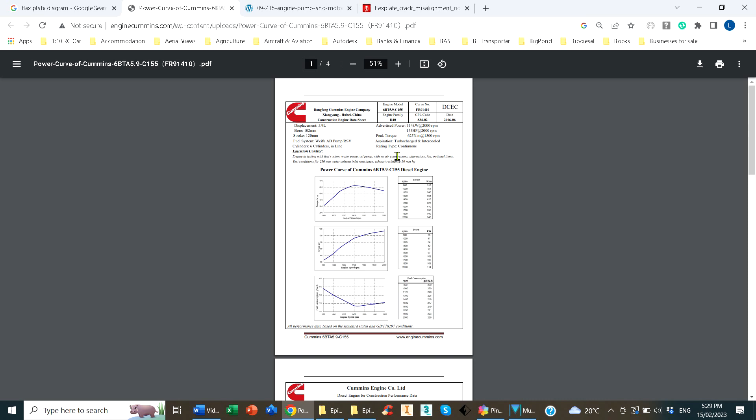Okay, you know what power you want to use now, so we've got to select an engine to do it. That's done using specification sheets from engines. You'll probably find your customer, or indeed you yourself, may have a brand of engine preferred - Caterpillar, Detroit, etc. But I'm going to use some Cummins information as an example. This is the first page of a multi-page data sheet from Cummins - it happens to be a Dongfeng engine, a 5.9, 6BT5.9.

Most people will look straight to these curves. If you're interested in horsepower, that's where you'll be looking at a power curve. Sometimes people will look at a torque curve and be very keen on what the peak torque is. I'm going to be controversial and say that peak torque doesn't matter - the role of the gearbox and drivetrain is to create torque.

There are two reasons for worrying about torque. One is that it makes the vehicle more drivable if it is at lower RPM, and that's typically the reason people like V8s. Apart from the raw power, it tends to be low down and they can get off the line easier.

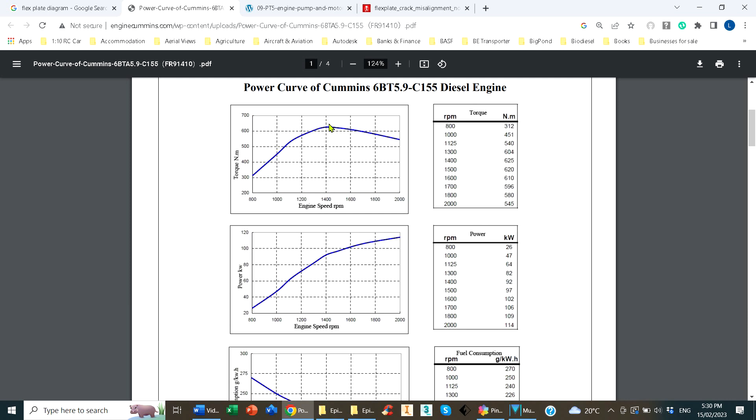The other reason that torque is important, and the speed at which it happens, is this third curve down here - this is fuel consumption. Generally, peak torque coincides with the minimum fuel consumption in grams per kilowatt hour. So the further down the hill that comes, the better, because that means you can get a highly efficient vehicle running down the highway.

You probably realize that even in your family car now, you've got 6 speeds or more, and if you're going down the freeway, you're at very low RPM. The reason for that is efficiencies - the lower the speed of the engine, the less losses within the engine.

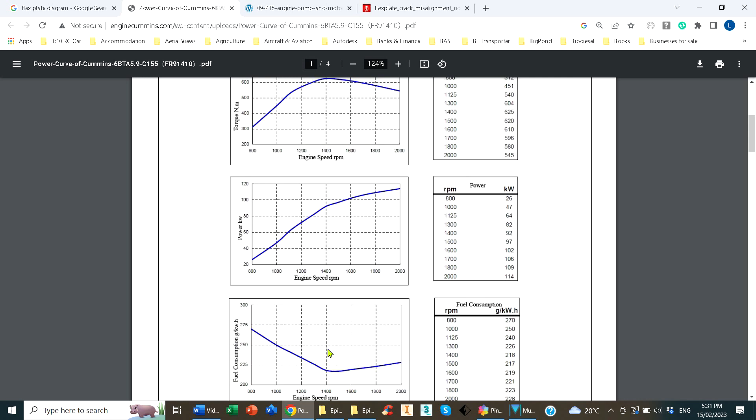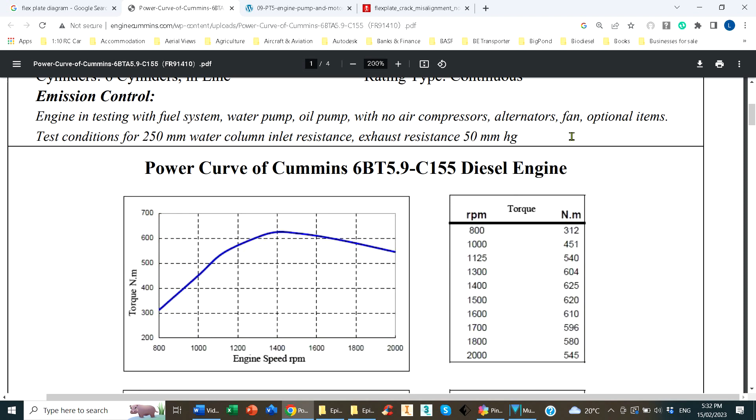Now, I said most people will go straight to the curves, and they will overlook the fine print. In anything, the fine print is important. Engine in testing with fuel system - well, that's good because it wouldn't have run without it. Water pump, that's probably good. Oil pump's definitely good. And no air compressors, alternators, fan or optional items. So this power curve does not represent the real engine, because in the vast majority of cases, it's going to have an air compressor, alternator and fan at the very least. We've already said that fans are a big power draw.

So you need to take these curves, let's say the power curve, and superimpose on it, perhaps underneath it, the power draw from the ancillaries. That'll tell you perhaps that this engine isn't big enough. Always read the fine print.

Now, in this particular case, it's pretty good. It actually says inlet manifold and exhaust back pressure. Doesn't say what temperature it was, but it's probably 20, 25, somewhere around there. They're also important characteristics.

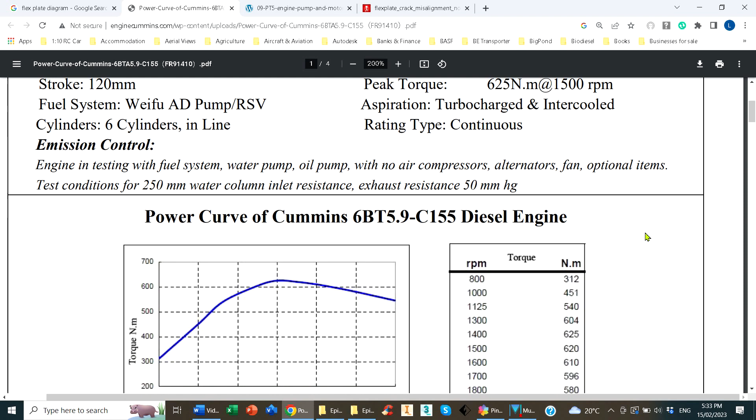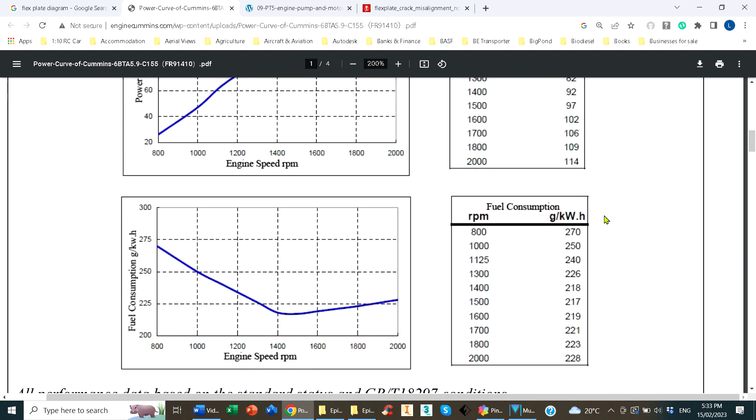So let's assume we've picked an engine. If we go down this data sheet, the first thing I like to do is select the components for the air intake, because without the air intake, it's not going to run. And here's some key data - maximum intake restriction, clean element, dirty element.

This is not the total resistance of the air intake. You still need to allow for pipe work and perhaps a whole heap of other things, being air shutoffs and extended pipes. But it starts to give you a pretty good idea of what you need to size your air intake.

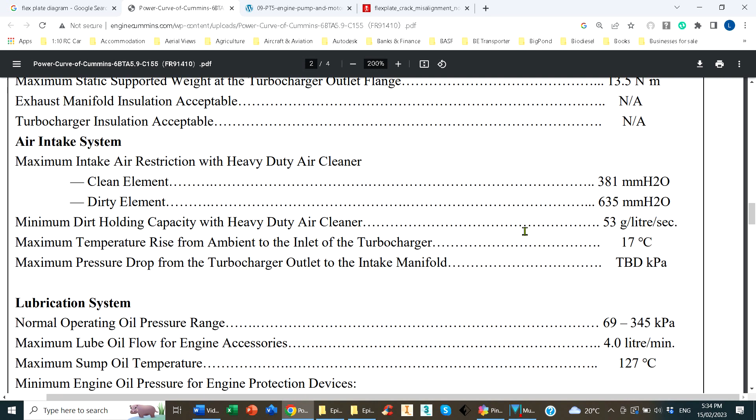Cummins also have this thing about dirt holding capacity. So it's suggesting a heavy duty air filter with 53 grams per litre per second of dirt holding. If I remember correctly, that's because they have a minimum in-service life for the air filter, presumably to try and stop people using air filters for extended periods.

So now you've got some basic characteristics for the air filter that you require. For me, I usually design a system that's got a resistance 3 times that of the air filter. That's typically for mining because there's a lot of other things that get inserted into the intake system, but I can come up with a number.

I then have to figure out the packaging. Now for mining, it would be a metal housing, not a boxy little plastic box - something robust that's going to survive the duty. And we're going to use a Fleetguard example here.

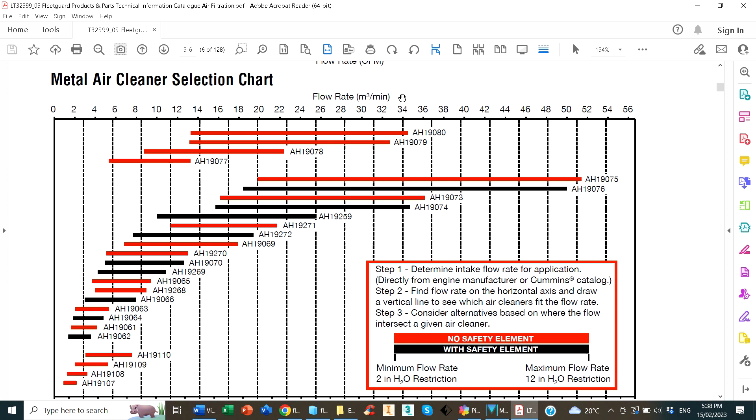Here's a chart for metal air filters. Now metal relates to the housing, not the element. And there's a range here of flow rates, and if I just move down a little bit, in CFM. And you can start to see how you might select one.

Now this gives you the option of red with no safety element, and black with safety element. I would suggest it's a very brave or foolish man that designed something without a safety element. So we're going to look at the black.

So if we know we need 900 CFM, we're going to be somewhere up in this range. Do you want to be right at the top end, or do you want to have something a little bit in reserve? So that's starting to give the selection of filters that you could use.

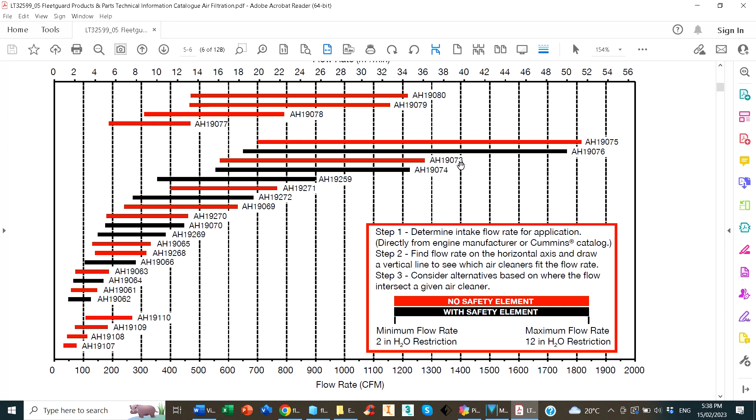So we'll just flip down and find the AH19074.

Now we've tentatively selected a model, we can look at some of the characteristics. The lengths - generally the filters are too damn big to fit. And that's why this step of selecting filters is very crucial.

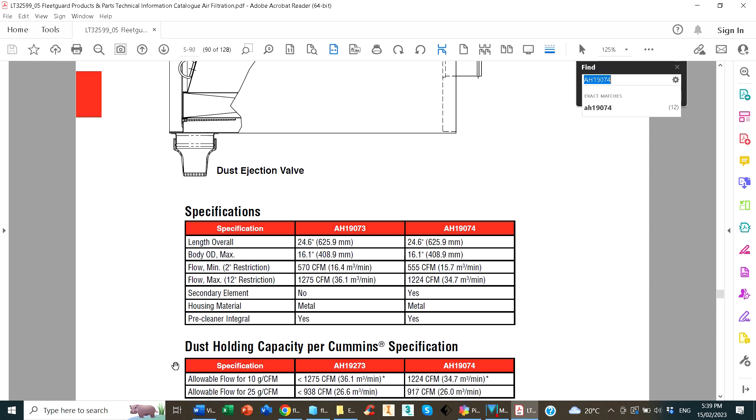You'll see dirt holding here and dimensions, specifications, and if we go down, we get more information, and even in this catalogue a suggestion of accessories like hoods and elbows and so forth. And there's the actual performance for this filter. All of this information is readily available and should be used, should be investigated, and make sure you've got the right product.

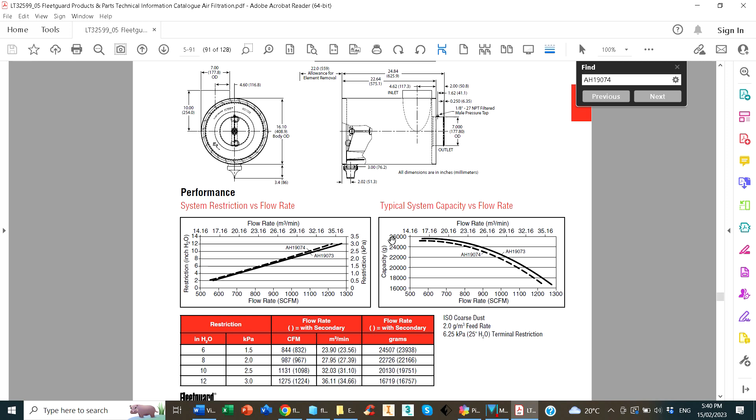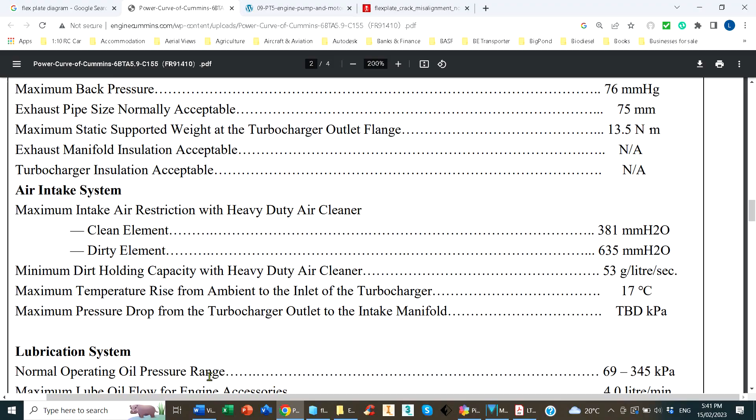The same sort of review is possible for the exhaust system. And again, we'll use some Cummins data. So back here on our data sheet, right next to the air intake system is the exhaust system.

Maximum back pressure, exhaust pipe, etc. So you straight away know what exhaust pipe you should be using, and you can start to work out what muffler, exhaust conditioner, spark arrestor, etc. that you require. So this again is core data that's readily available. Up to here.

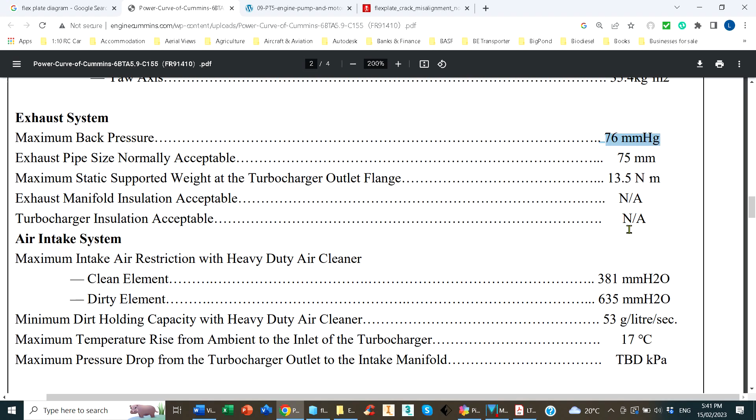But of course in exhaust systems that isn't the end of it. You're likely these days to have a DOC or a DPF to either oxygenate or otherwise treat the exhaust.

DPFs come in 2 types, wall flow or flow through. Advantages, disadvantages for both - they're designed to handle particulates. DOCs are generally designed to oxygenate the exhaust to allow other combustion processes to happen, and they often form the first phase of a DPF.

These things are expensive, they're generally sensitive, they don't like an engine idling for a long time and then put into heavy duty service - you'll probably melt something, an expensive something. If you're running ceramic wall flow DPFs, you're probably going to have scheduled burn-off times to get rid of the particulates that are trapped inside. Again, another complex subject, not going to be covered in detail today.

Many mining applications also have exhaust gas coolers. They can be of various types, but typically some sort of heat exchanger with special tubes that the gas runs through and is cooled by water, typically from the engine water jacket. Some flow is stolen from the engine block and passed down through the gas cooler. So again, that's more resistance that you've got to design for in the exhaust system.

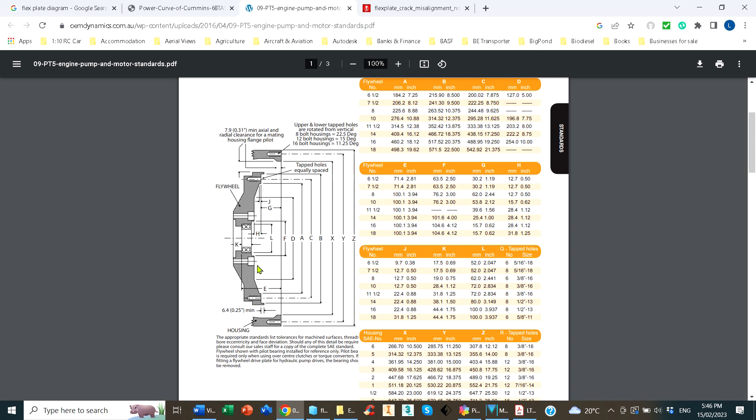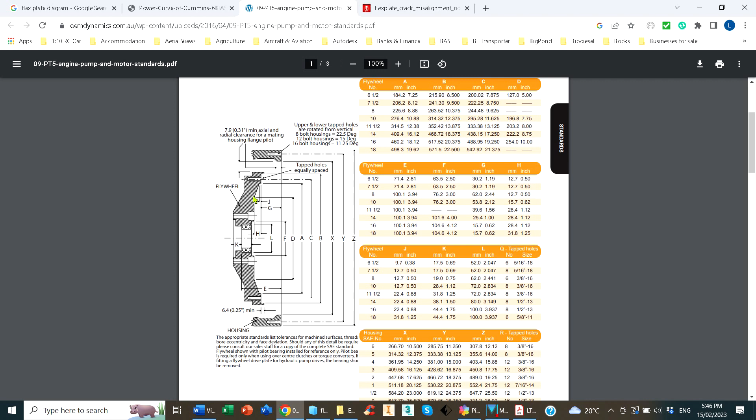Now, some sort of transmission will plug in here. It will hang off the flywheel housing and connect to the flywheel. Whether it's a generator or automatic transmission, the same criteria apply. You have to match housing and the flywheel. But of course, it's never that simple, even if you get a good match.

The flex plate being bolted to the flywheel, and then also bolted to the torque converter. It's there to allow for minor misalignments and just take out some shock loads.

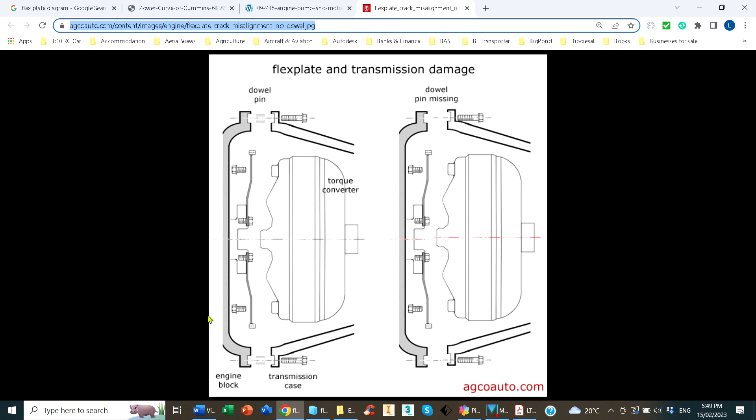Now, I have had engines and transmissions from the same manufacturer, involving the same manufacturer's engineering team, where the two bolted up perfectly. But no one left a hole down here so you could get a spanner in to get that screw tight. This sort of silliness does happen. It's a regular part of trying to match engines to transmissions. You need to be aware of it, and you need to be on top of it right from the start.

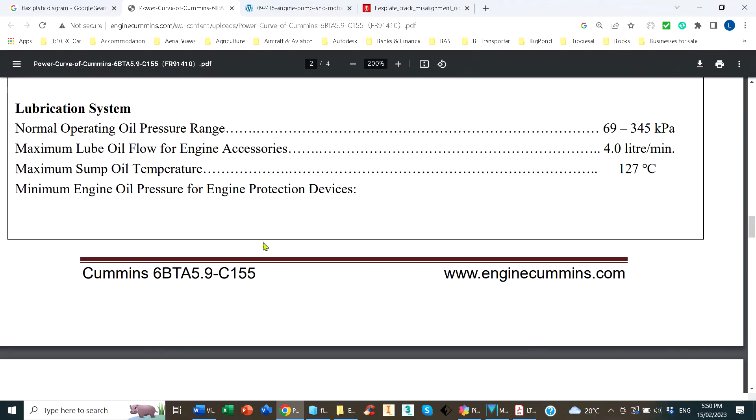So we're now going to talk about cooling the engine. And once again, we'll go back to that Cummins data sheet. Further down the data sheet, there's the cooling. How much coolant, flow resistance, usually you get pressure and so forth. What your thermostat is doing, pressures, temperatures, flow rates, etc., etc., etc.

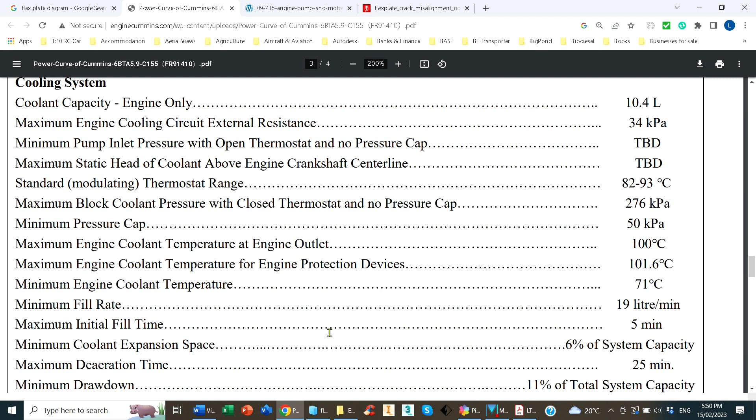Now, this is really good data. It's not the full amount. It doesn't tell you how important drawdown is, for example, but it's the start of what you need to determine how the engine is going to be cooled, or what the engine needs to be cooled.

And if we look here, it also tells you some interesting things. The normal engine operating temperature at maximum is 100 C, but your shutdown sensors are supposed to operate at 101.6. So what that tells me is this engine does not like getting hot, and how much the system is pressurized, you're definitely going to need a 50 kPa cap or more. You may need to pressurize it more so you can get more cooling out of this very small safety band.

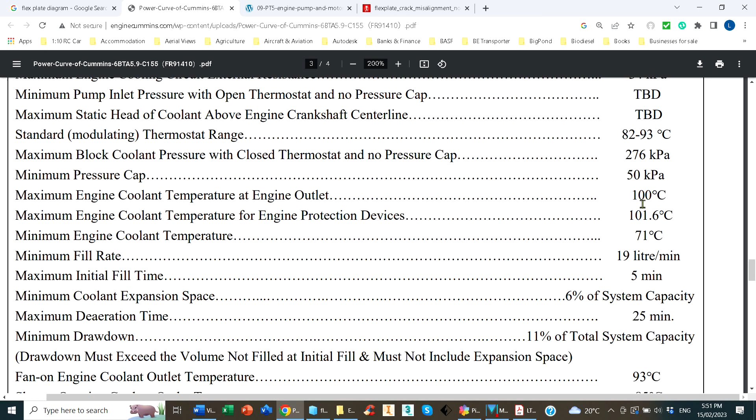In reality, there's never enough room for cooling. Cooling is quite big. You've had enough trouble fitting the engine in. Now you've got to get this damn big radiator in. And worse than that, the hydraulics needs a cooler, the transmission needs a cooler. Maybe there's an aftercooler involved as well, an air-to-air aftercooler, which I hate because of piping. I'll go to a jacket water aftercooler any day.

The typical unprofessional approach is just to stack those coolers up in front of the radiator. And you can get away with that to a certain extent.

If it's a sucker fan and you're stacking coolers in front of the radiator, you're giving the engine radiator higher temperatures and less flow than it needs. The air coming to it is already preheated by all the other coolers in front of it, and you're not getting as much air through because the resistance the fan sees stops that flow being what it should be.

You need to think very carefully about where those other coolers go. If you can, stick them somewhere else with a little electric fan. That's not always possible - for example, underground coal mines, electric fans are not a real possibility.